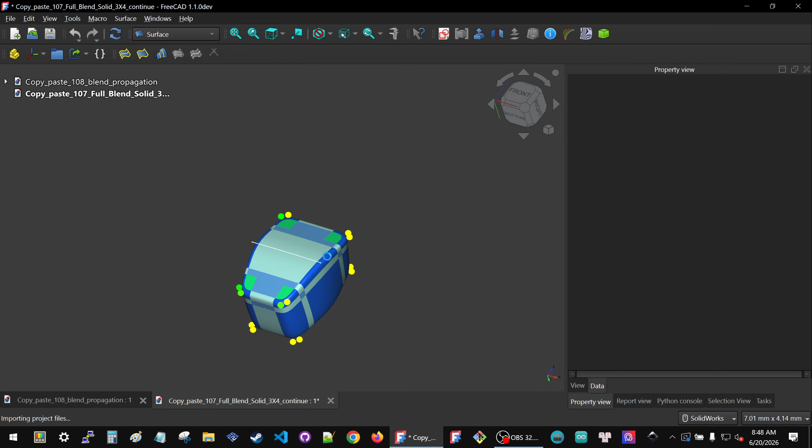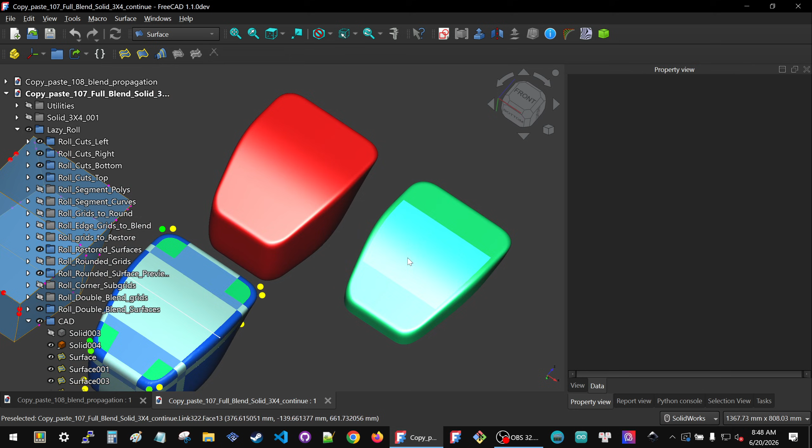Here I took these, all the objects we had last time grouped together. And then in this version, instead of using the preview triangles, I replaced these with filling surfaces from the surface workbench. When we look at it at this level with all the lines mostly straight, you can't see too much of a difference between the two. There's 4 defects in these, but you can't really see them easily.

But when you put more curvature on the object, then you start seeing them more. So I'm going to take this curve and make it really big. Hit OK.

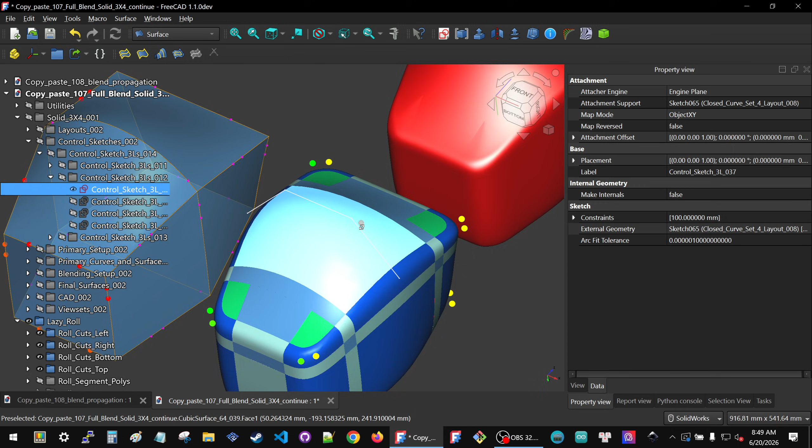Okay, so now I have a lot of curvature in the middle. And you can see on this red model here that the triangles, the default preview triangles that I made by putting a 3x4 grid on this object right here, which we used to create the rounding triangles - when there's a lot of curvature, it doesn't behave so well anymore.

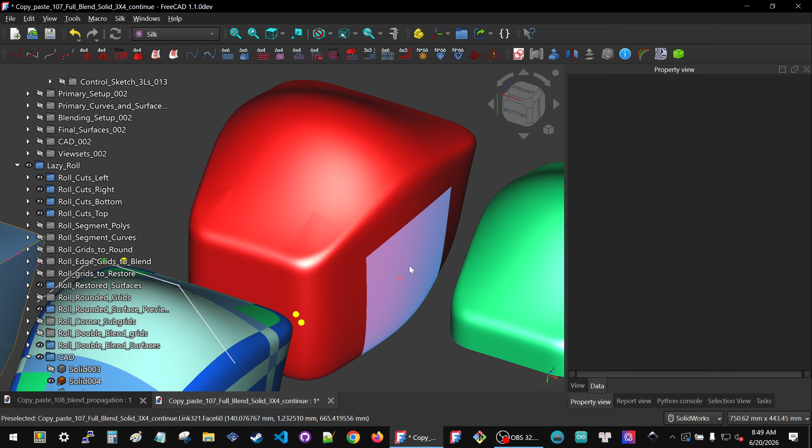And that's why I said this is just a scaffolding piece. The important thing is that it creates a good piece here. And then I replace it with the surface from the filling surface from the surface workbench.

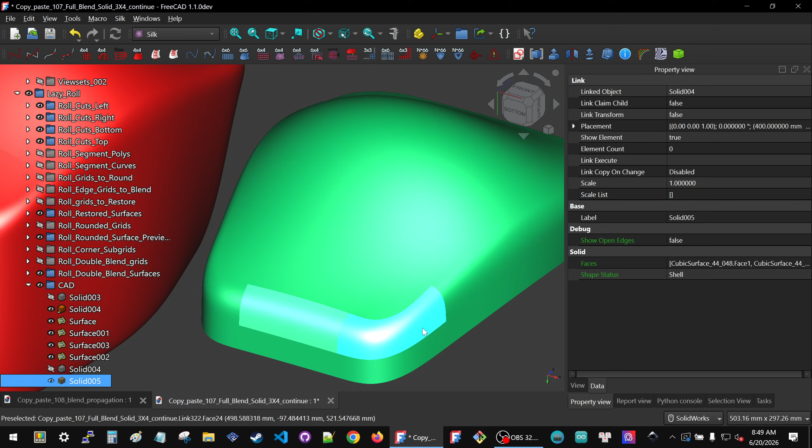And those, even though they were creating extra bumps when I did the test I showed you on the surfboard, now that I've taken charge of the corner itself, replacing just this little piece here tends to work out really well with the filling surface.

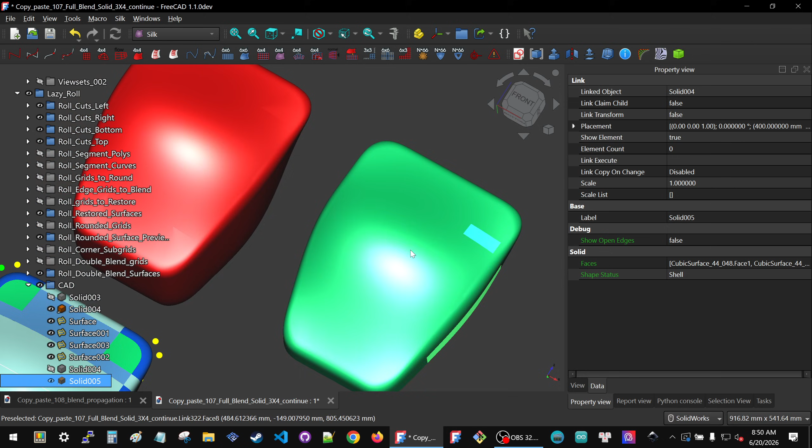So here I'm showing, you can see the defect here. You can also see it here. And you can see that those are taken care of well by the filling surface.

But you still don't want to absorb too much of the surface with blends. What I did on the bottom here is a little bit silly, right? I mean, I'm only keeping this much of the surface and making it really big. But this is a bit of a caricature, so you can see what the different parts are.

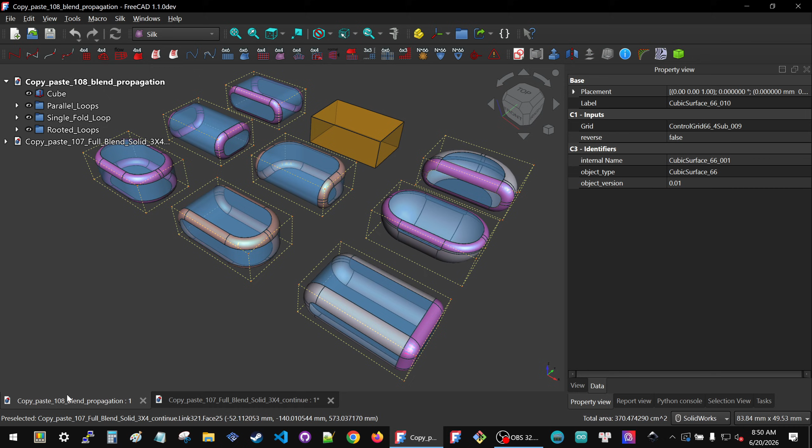And we'll play around a little bit more with this in a minute. I wanted to talk about the structure and the strategy for how you're going to do these blends when you're doing this rolling blend business with one really large radius and one small radius.

The one we made is this one. I've got this group here. I call these the parallel loops. You do the full loop on one side and the full loop on the other one, so you could make it flat, like a board, like this one.

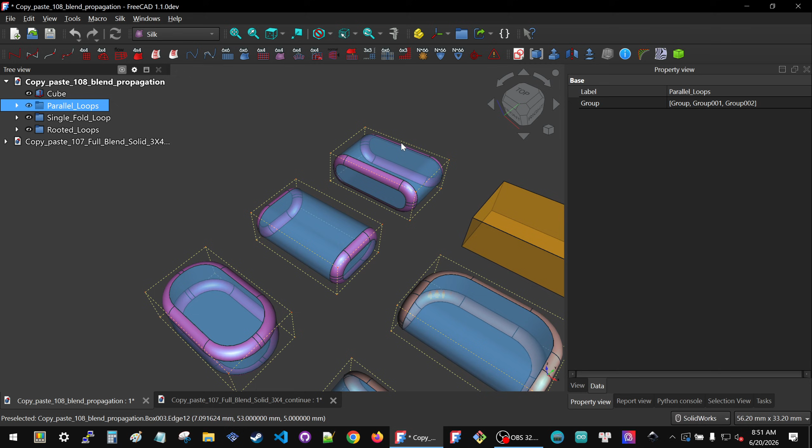You can make it long like this one, which is kind of like a stick almost. Or you could do the middle dimension here. But you can also snake your way all around by reversing when you get to the other side. So here you get 2 characteristic shapes you could get here if you do that.

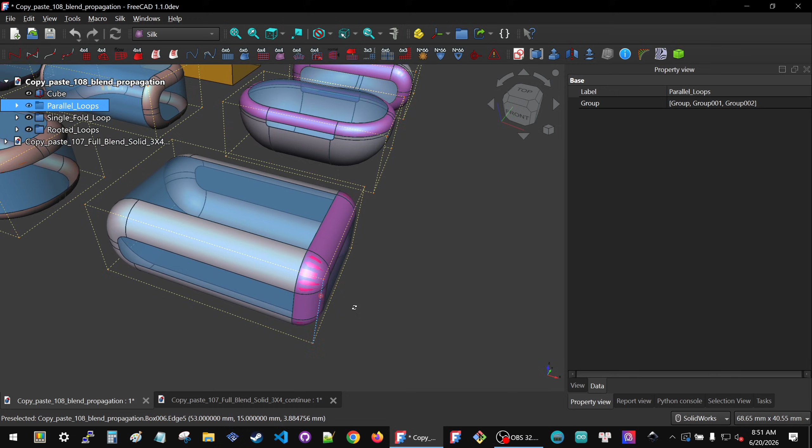But that's not all. You can do one entire face, like in the case of the parallel one. But just because you've made an entire face doesn't mean that you have to do the other side. You could just finish the other loop.

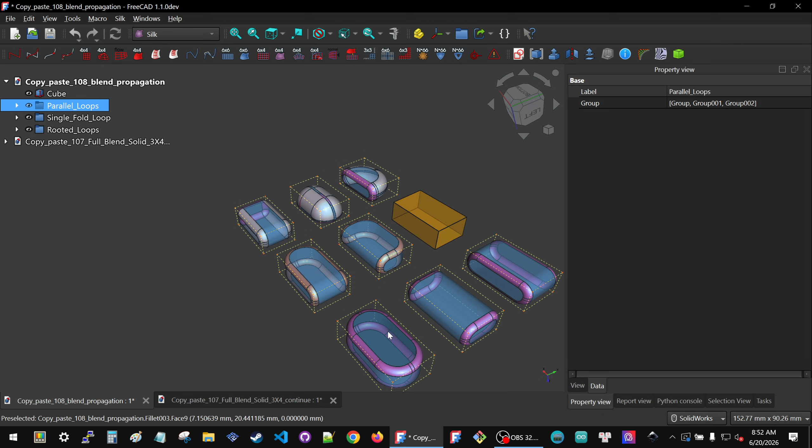But now you need to think carefully about the sizes that your blends are going to have, because the blends have to maintain the same proportion of the surface all along the way. But it does give you a bunch of choices, and different choices result in very different shapes. Like these 3 have something in common, but these guys here can start to get pretty wild.

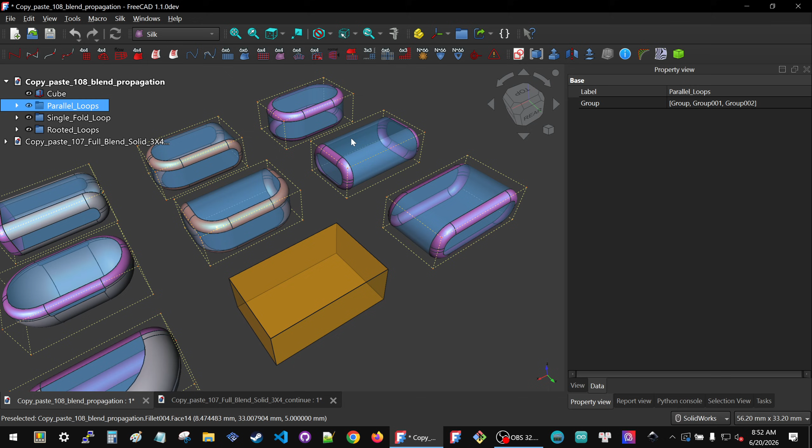So it's just to give you ideas of the kind of things you can do. Now, keep in mind, this is just representing normal fillets on a block from the part workbench. But it was just easier to whip up these images to create these objects so I could show you the structures that I'm talking about.

But these, right now, in the case of our object here, with the 2 sections here, that would mean that there's a division in the middle here, but there could also be a division down the middle here. This is a 1 by 1 by 2.

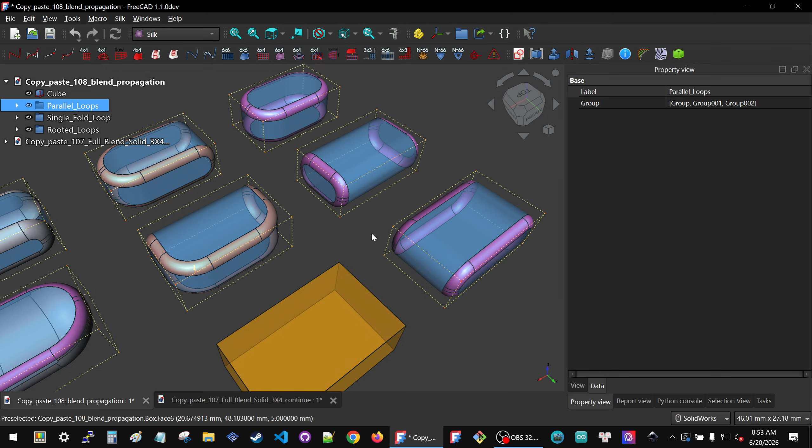And here I'm showing a 1 by 1 by 1, but it could be any number of surfaces along each edge. All right, this is just to give you an idea of the kind of possibilities with this type of structure.

Possibilities, but also constraints. When you put this really large fillet here, it has to chase all around the edge, at least for the time being.

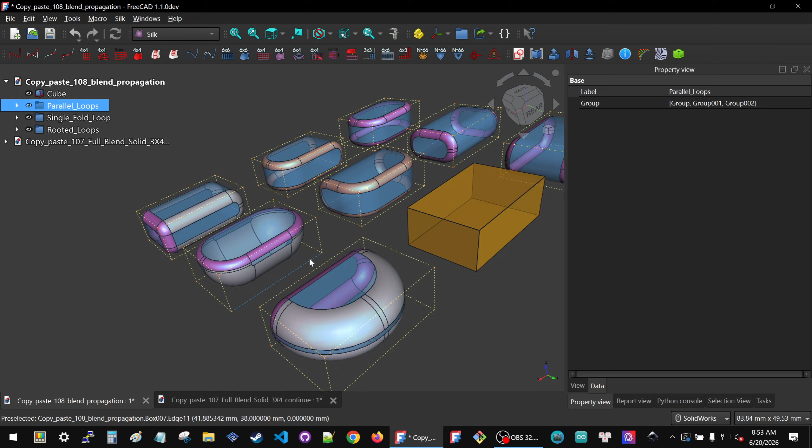But if we look back on this one, you see the result I get when I finally swap in the filling surface for the maximum quality that I know how to make with this system. I get a pretty good result, but it's still a good idea to limit the size of these things and not absorb the entire surface.

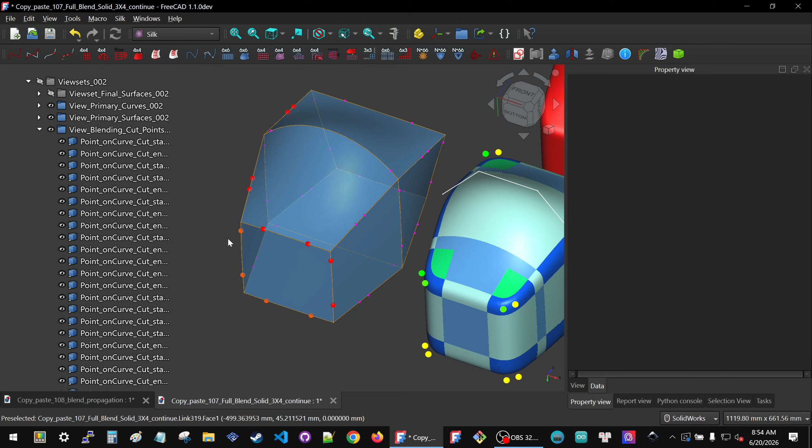I did this on this model so you could see that you do have range on where you put these things, but really you should be using the curves to sculpt as much as possible, and all of these blends should, in the end, basically be as small as they can be and still get the job done. So when you're working on this, you have constraints. You have constraints on your curves that you're not allowed to completely align them. You have to maintain a little bit of angle between them, like we talked about when sculpting the nose of the surfboard. So that leaves a little bit of angle, and you need the blend, but the blend can't do everything. Your basic curves can't be completely smooth, and your blends can't absorb everything. You need to balance both of those things.

And that still leaves a lot of possibilities. Let's play around some more with these curves a little here, just for fun, and see what we can get away with. For example, how about I reverse these guys into the center?

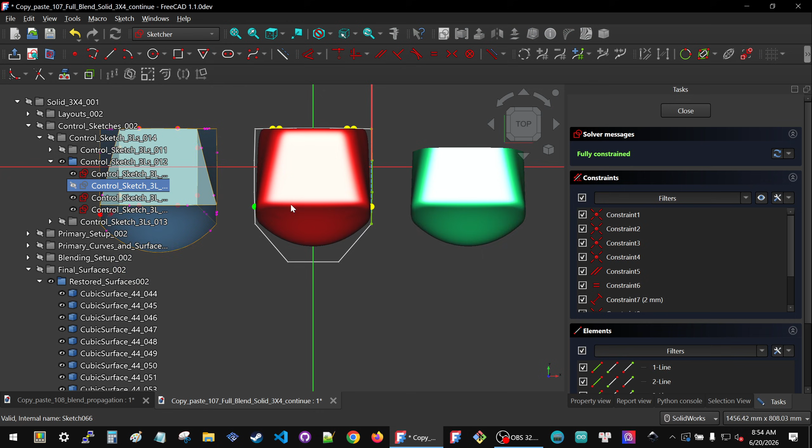I'm going to do a section cut. Got this guy right here. Where's its dimension? Right here. Here's its dimension, it's at 2 on the outside. I'm going to delete that, stick it inside. Point, line, type D, dimension, 20 to the inside. What does that do?

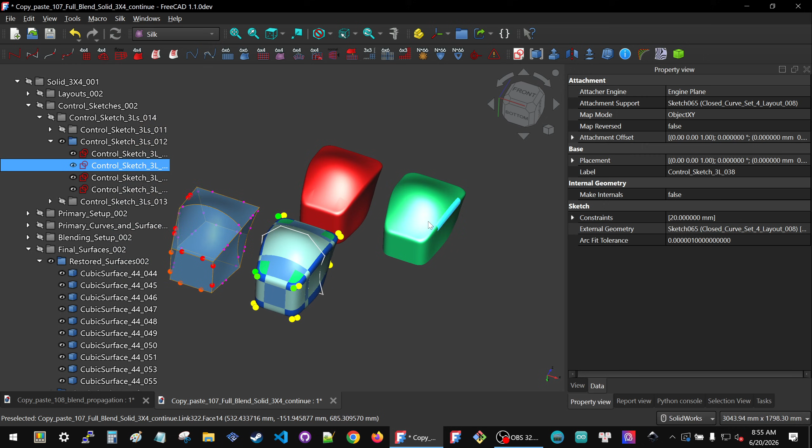Still working. So I've squeezed it a little bit on the inside. Maybe that's why it's bulging on top. And it's working okay over here. All the blends on this side are fine because remember, all the red corners that potentially cause problems are only on the top and bottom. But it's handling it fine.

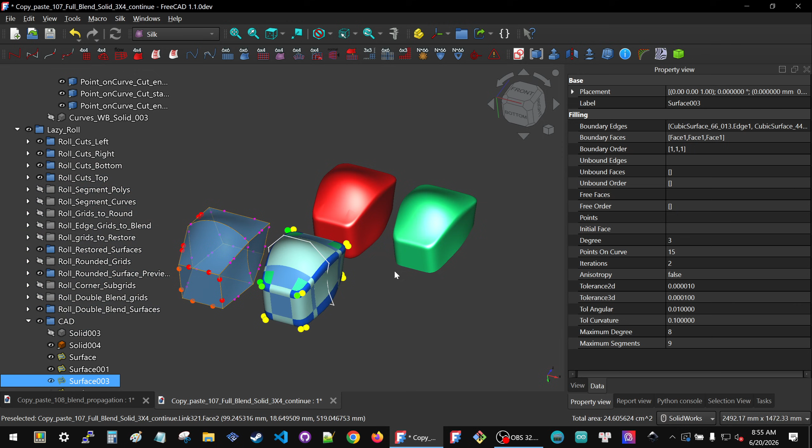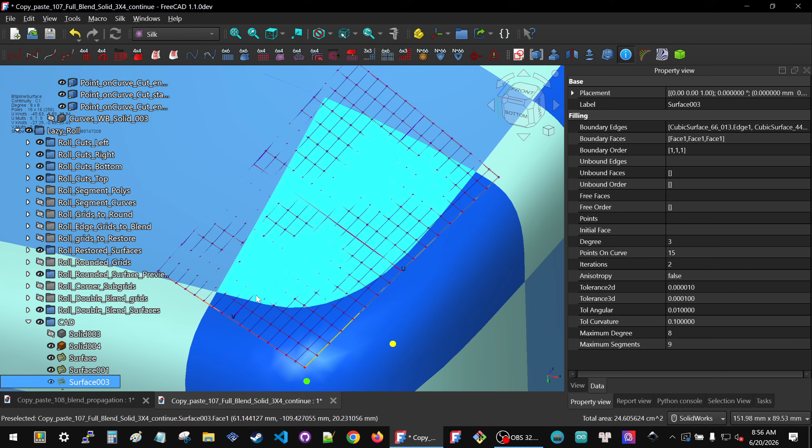So that's what I want to show. I want to show what happens when—oh, by the way, let me show you using the curves workbench how complicated the surface ends up being. But it's worth it, because it's relatively flat. You can see when I look at this grid here that it doesn't have crazy spikes like mountains when it's trying to accommodate the job we're giving it, because this area here is very similar to simply being part of this surface, which is very simple and well behaved.

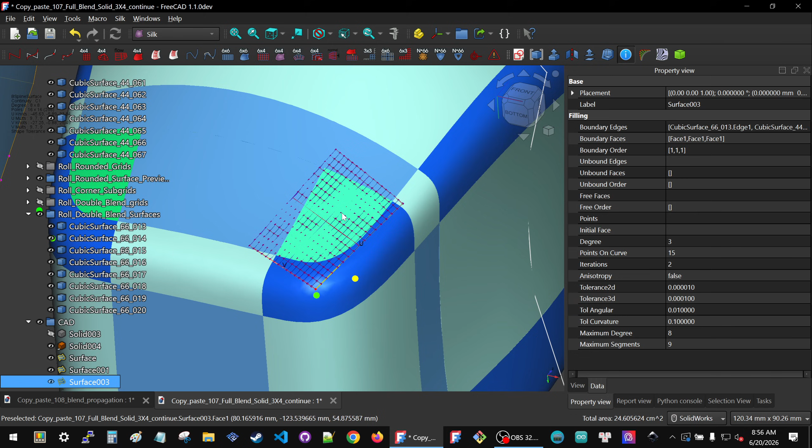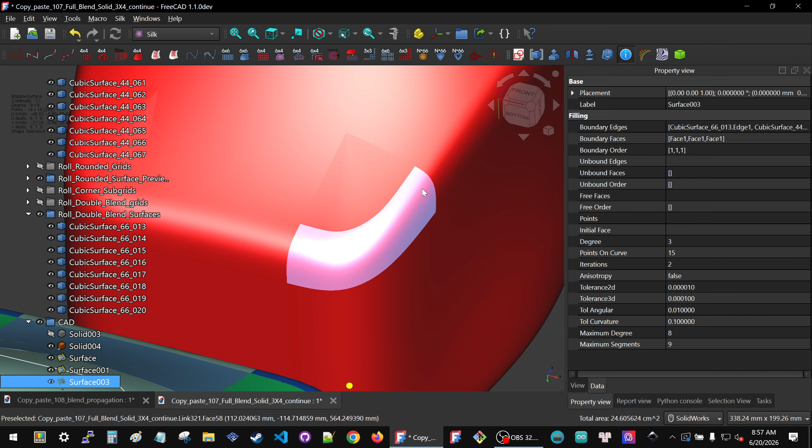And you can see that this is the simplest silk surface, slightly more complicated silk surface, currently one of the most complicated silk surfaces if you ignore the star surfaces. And then when I finally use the filling surface, I let FreeCAD throw as much firepower on it as it wants, but it doesn't control my design. When I use this filling surface, it's not creating a new feature in my model. It's just replacing a crappy scaffolding piece that I needed in order to define my corner blend. And now that I have my corner blend, I can remove this face, and FreeCAD gives me a good one.

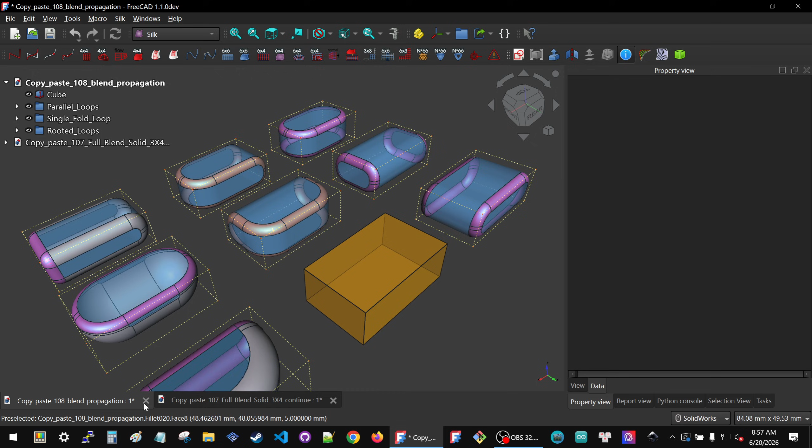All right, and I also want to point out that I like these shapes. I think they're fun to play with. They can give you some ideas on how to strategize all your fillets, but still you should keep in mind to make those fillets and blends of a reasonable size. Do a lot of design—do most of your design with these curves. Make sure you don't align them at the corner in places where you're not allowed to.

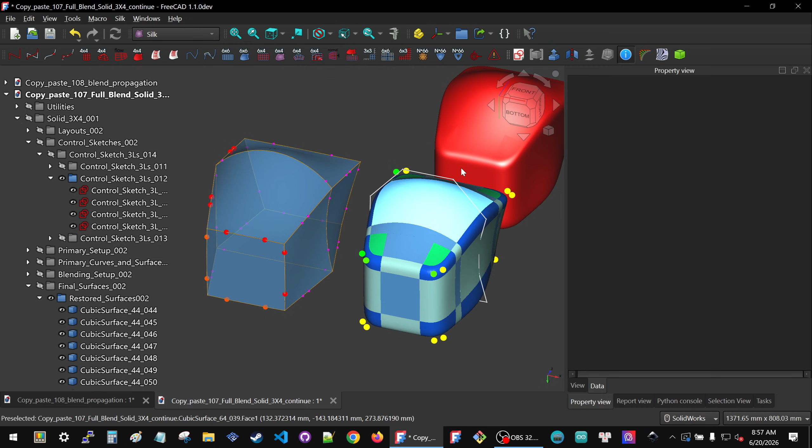You're not allowed to align this one and this one. I could align this one and this one—there's no rule against that, but there's not much point to it. You might as well use the internal points on here to really control the inside of the surface. And if you do that, then you can let a reasonable blend take care of the hard edge.

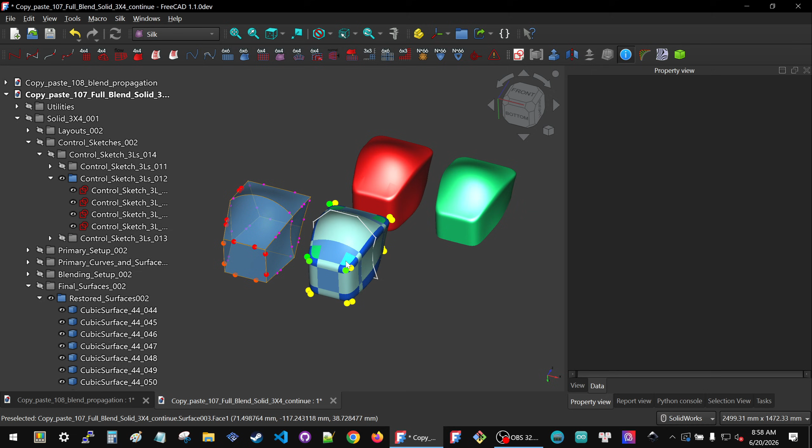All right, so I'm debating right now whether I'm going to record me doing all of this on the surfboard, but right now my thinking is no. I think I'm just going to create this topology on the surfboard, and then when I've done that, I'll record the fine tuning of those blends on the surfboard. All right, catch you next time.